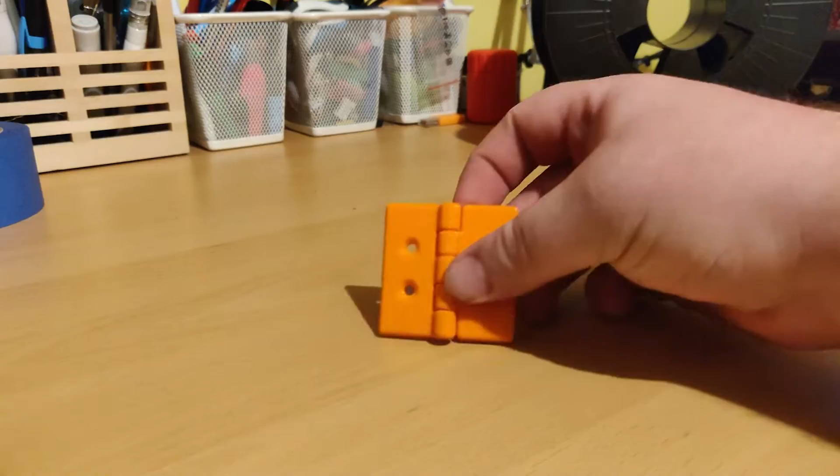Hi, I'm Connor from Connor.engineer, and today I'm going to be going through how I designed and 3D printed this hinge mechanism in SolidWorks. You can see it's very similar to a common door hinge, except it's a lot smaller, and the hinge mechanism moves quite freely.

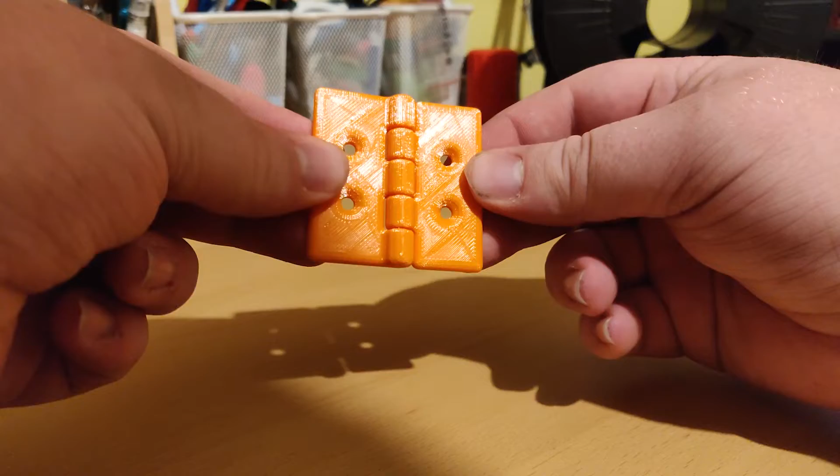I'm going to go through how to draw this in SolidWorks and how I worked out the different tolerances, so you can see there's no play in it or anything. I had to do a few different prints to work out the tolerances. If you saw my previous thread drawing video, you'll see how I figured out the tolerances for that. The tolerances for this are different because this is a print-in-place model, so it prints as one piece and you can't take it apart. But it's still able to move because there are gaps within the part, even though it can't be taken apart.

So we'll go over to SolidWorks now.

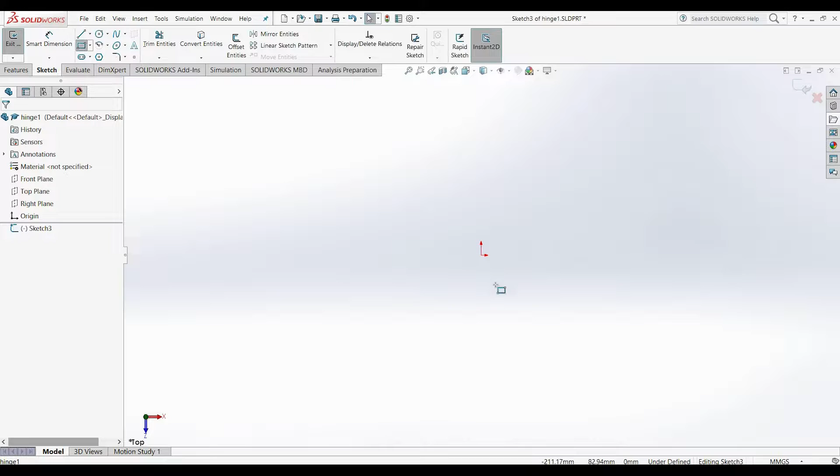I've just created a new part here in SolidWorks, and I'm going to start a sketch on the top plane. I'm going to draw a rectangle to start the basic shape of the hinge, and I want it to be 50 by 25. These dimensions don't really correlate to anything, it's just a small print so it's quick to print, because I had to print a lot of different ones of these to get the print working.

So we're just going to extrude that up 4mm as well. This isn't really important either, it's just to give a quick print and kind of gives a solid test piece.

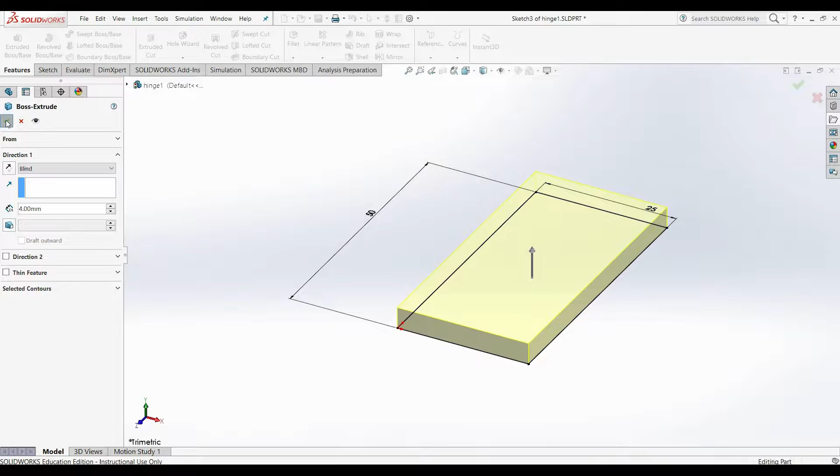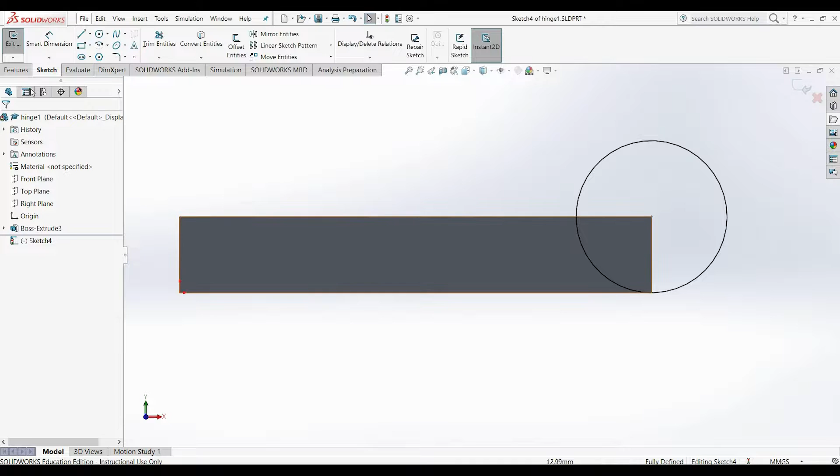So that's our main rectangle. We're going to come parallel and look at this edge, and now I'm going to sketch on the end of this, and draw a circle whose radius is the same as the height of this piece. So that circle is fully defined because its radius is along this line, and we're going to extrude this the whole way through the piece. That's going the wrong direction, so we're just going to go all the way through to the other end, and you can see that we're now starting to get the basic shape of our hinge here.

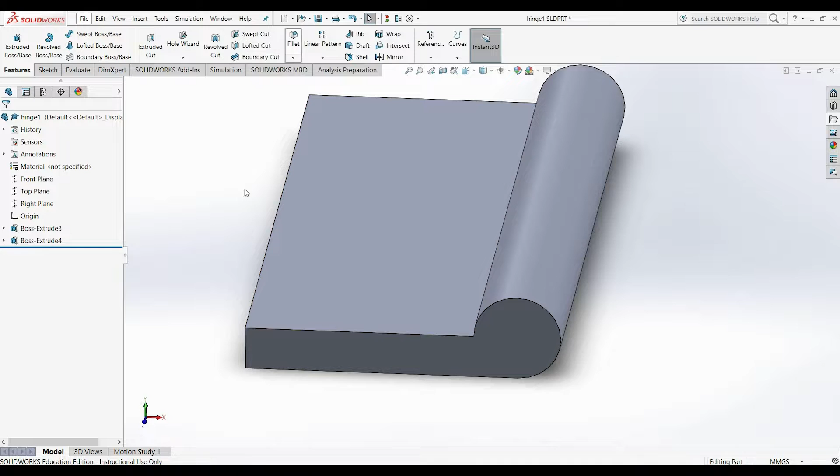The next thing I'm going to do is put in some fillets, just because it's convenient to do this. I'm using 2mm fillets here, just because it'll give us a nice rounded edge on this piece, since it's 4mm high, so you can get two 2mm fillets on a 4mm wide piece.

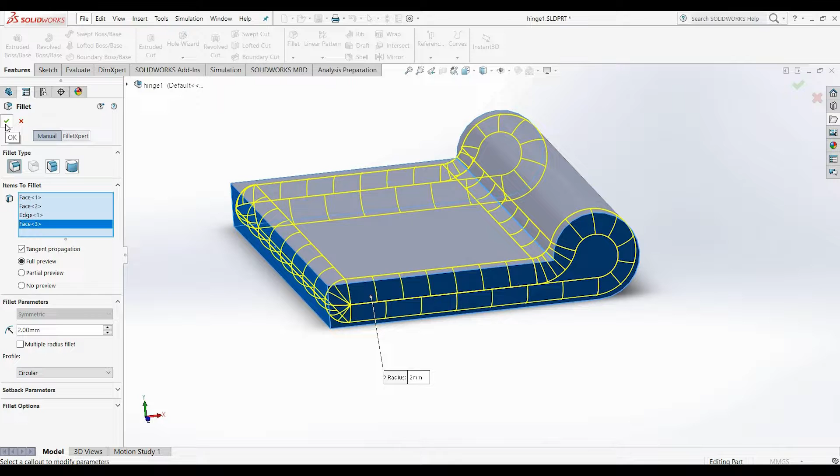So that's starting to come together now. I'm just going to draw some holes. These aren't really that important, it just kind of makes it look more like that classic door hinge shape that you would see.

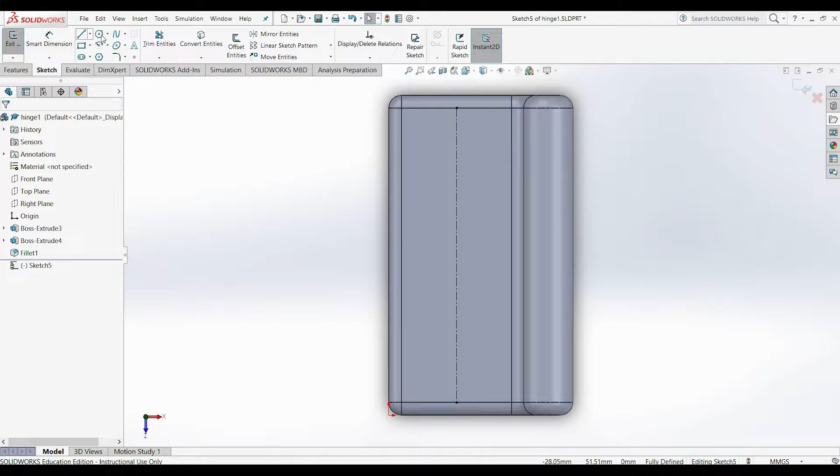I want this to be along this construction line just to help me line up the circles. I want it to be in the middle of this piece here. So we have those two circles. I'm going to pick 4mm here - again, it's not really that important, these are more cosmetic than anything else.

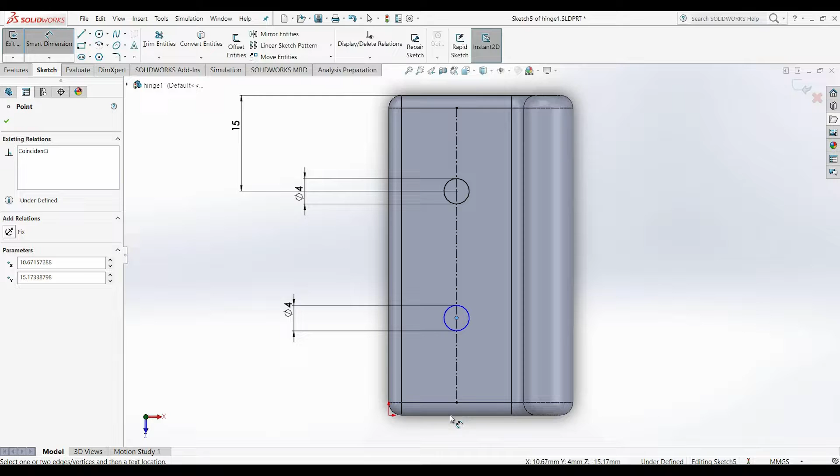Because the piece is 50mm high, I'm just roughly dividing it into thirds here. I know 3 x 15 is 45, but it kind of roughly gives you the right amount - you could work it out properly. But again, these cuts are not functional, they're just cosmetic. So we're going to cut these through all.

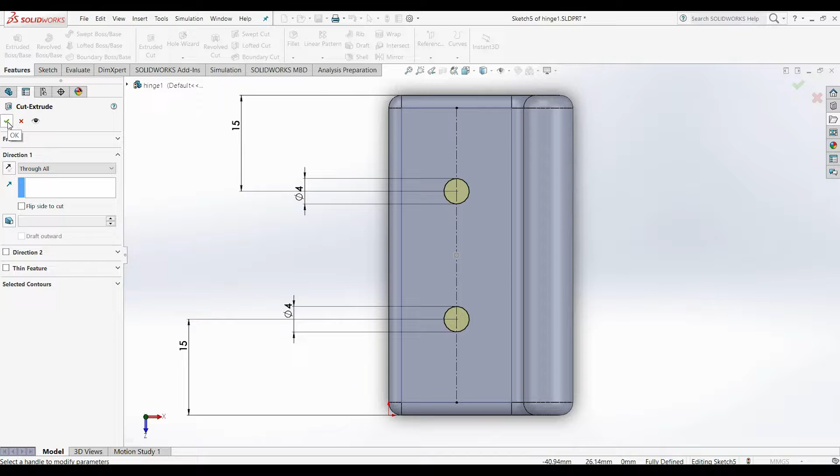Next I'm going to put a chamfer on it. Again, this is just to make it look more like a door hinge, it's not a functional part of the piece. So we're going to put a 2mm 45-degree chamfer on both of these, and now we're just going to do some more filleting.

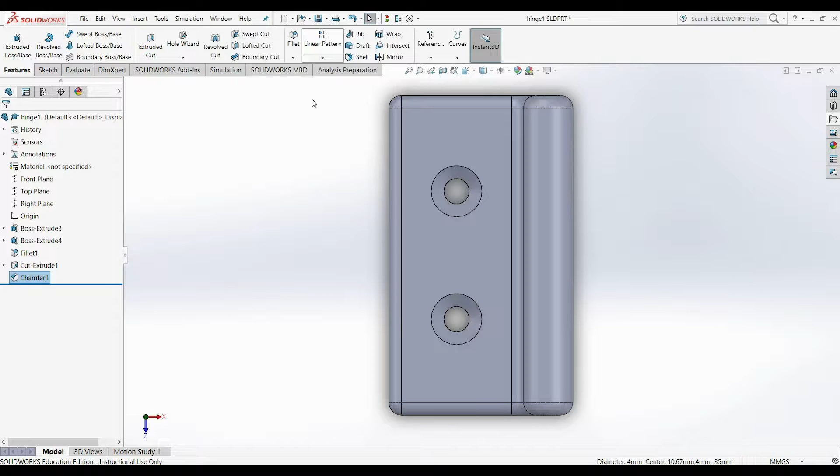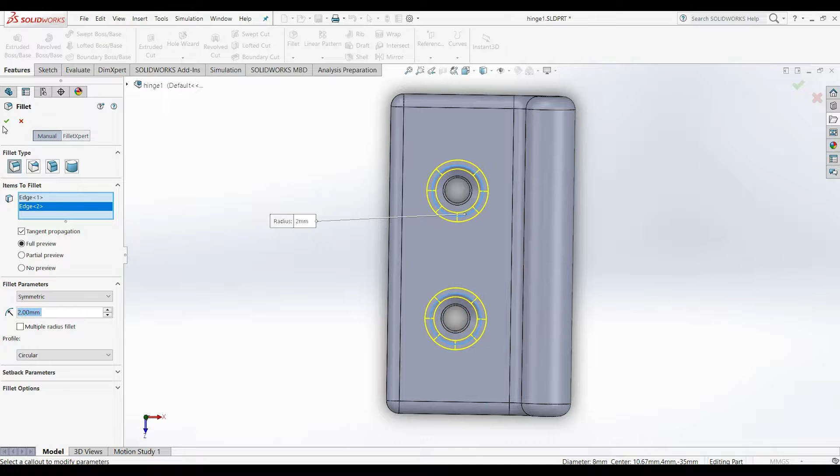Just because I don't like to have sharp corners in my designs. When you're working out fillets, just try and get the sizes to where it looks good. Like these are 2mm fillets, I could easily use a different size, it's just I think it looks nice.

So we have our holes in. What I'm going to do at this point is save this model, because we can use this part again to make the second half of the hinge. So I'm going to save this.

So now we have two parts that are both at the same stage. This is the basic hinge shape. We haven't done any shaping on the actual hinge itself.

Okay, so we're going to start drawing the gaps for the fingers here. Sorry about the cut, I forgot to switch back to my hinge 1 part instead of my hinge 2 part.

So the first thing we need to do is put in a reference plane. This is just so you can draw on this particular plane—you have to draw on a plane, you can't just draw in midair. So we're going to draw this in 10mm from the end, and open a sketch on this plane.

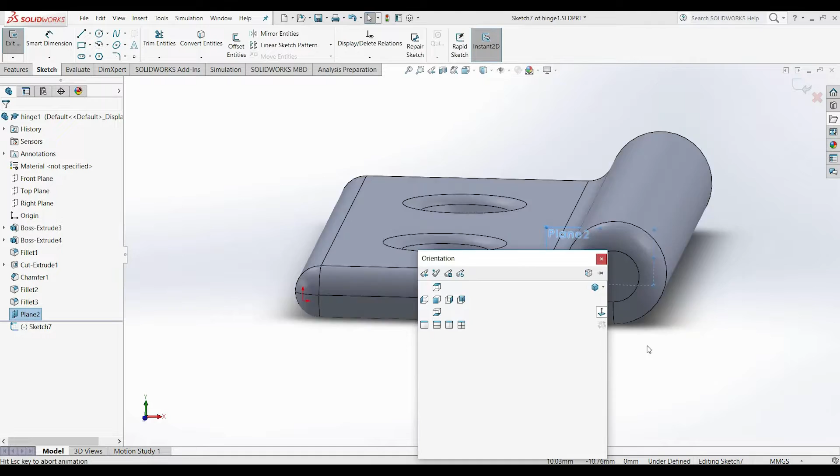I'm going to come normal to this plane just so we can see better what's going on. So I'm going to draw a circle, and this circle is going to be concentric to the circle that we drew originally. This circle is going to be 8.8mm wide.

So just to explain where the 8.8mm comes from: this circle is 8mm wide in diameter, because its radius is 4mm from the height. I discovered through experimentation that the best gap to leave for print-in-place parts is 0.4mm everywhere you want an air gap, so you need 0.4mm on each side—that's where you get the extra 0.8mm from.

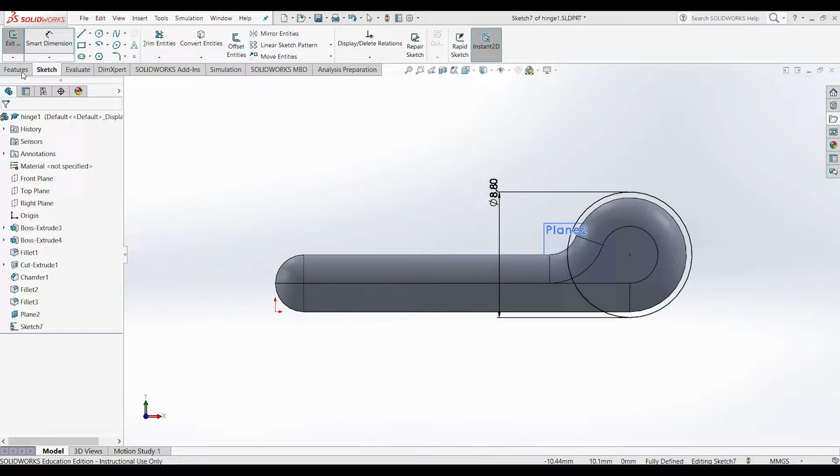So what we're going to do now is extrude cut this through some of the part, and we're going to extrude this 10mm into the part.

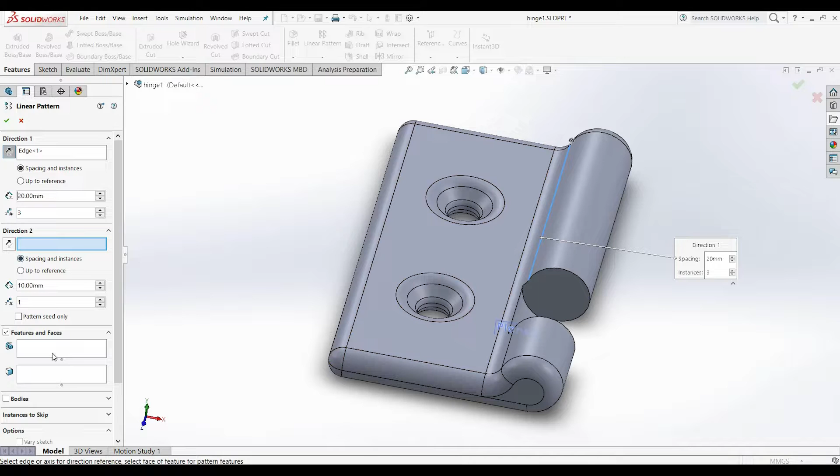Now we're going to create a linear pattern of this, just so I don't have to draw it again. So we just need to pick any edge going in the direction we want, and then the feature that I want to pattern, which is the cut.

And I want it to be 20mm, and I only need—sorry, 2 of them. So that's going to create another cut here.

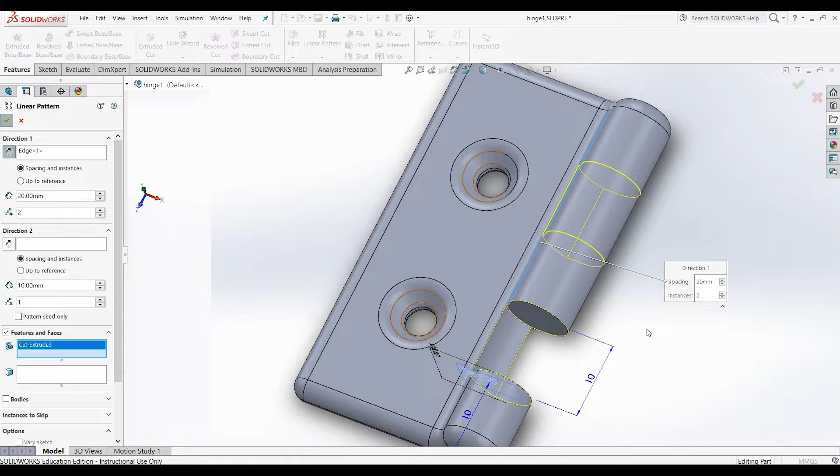So now we have our two gaps. We've created 3 fingers on this hinge.

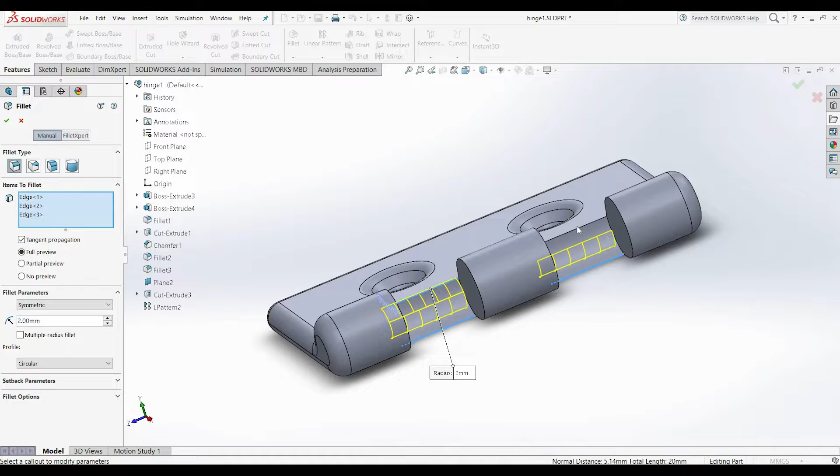So we're just going to put in some more fillets, again 2mm, just because that's what we've been using. And they're going to go in here to create a rounded edge and get rid of these sharp edges that are there. So that looks a bit better now.

So we're going to draw the actual lugs that come out into the other part on this piece, just because I think it's better to draw them on this piece than on the other piece.

But the first thing I'm going to do is hide this plane. I like to hide my planes and axes that I use for referencing, just because it makes the part easier to look at and follow.

Okay, so I'm going to open a sketch on the top surface of this model, and we're going to start drawing the sketches to do the revolves of the lugs in between the gaps.

The reason we can open the sketch on the top surface of this model instead of having to open a new reference plane is because this surface is 4mm up off the top plane, and the top of this is 8mm above the top plane. So this surface is actually in the middle, which just makes it easier for us since we don't have to draw another reference plane.

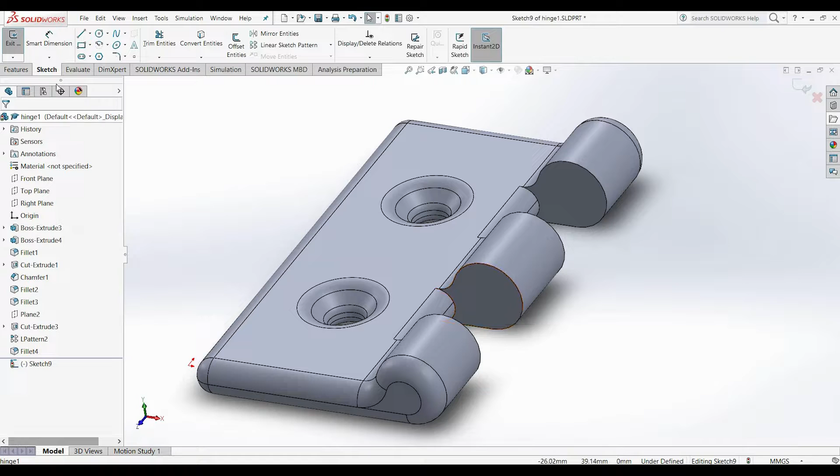So I'm just going to look onto this and start drawing my sketches. The first thing I'm going to do is draw a center line, and I'm going to make sure that this is 4mm away from the edge of this.

Because the center point of this line is no longer in the center of the circle that we originally drew, due to the fillets that we've done. So I just wanted to make sure that that is actually in the middle.

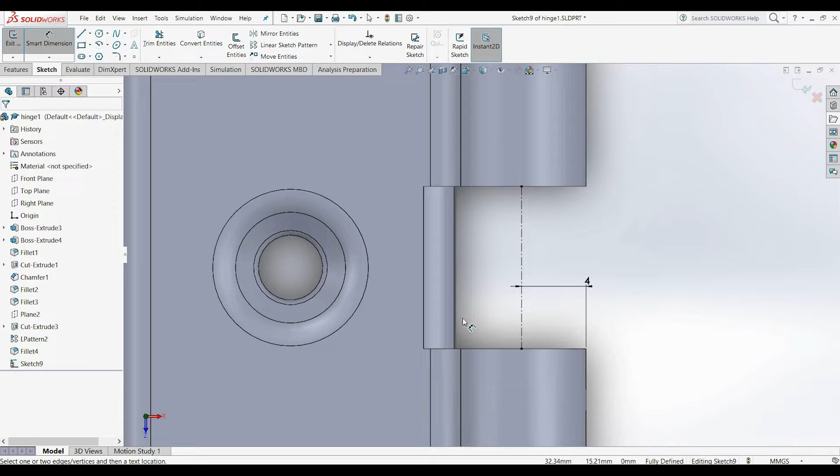The next thing I'm going to do is start drawing half of the lug, just to get the basic shape of it here. And remember, we have to close off our sketches when we do revolves.

So the height of this is going to be 3.8 mil—we'll go through these measurements in a minute—and the base of this is going to be 2 mil.

And the top of this is going to be 1 mil. So where I got 3.8 mil was when I originally drew this model, I drew it for a 0.2 gap between everything. But that wasn't enough because the parts fused together. So I redesigned it to be 0.4. Originally this was 4 mil with an extra 0.2 mil gap, but I had to pull it back to 3.8 mil because when I put this out to 4 mil and then put another 0.4 mil on top of it, there wasn't enough plastic in the middle for the other piece to hold together. So that's why it's kind of an odd measurement at 3.8 mil.

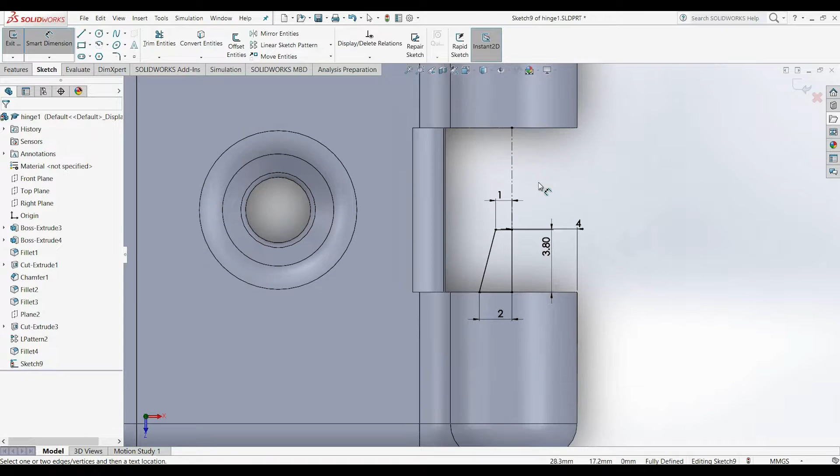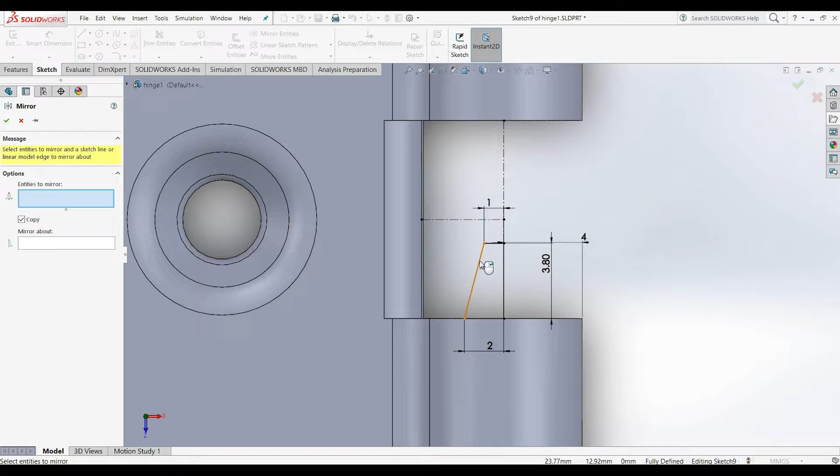The next thing I'm going to do is mirror this onto the opposite side of this piece, so I just need to find a center point here, and go to the center point of that line. We will mirror this across the other side. It'll just save us having to redraw this on the other side. Also, if we want to come back and change measurements, if we change this one, it'll change all of them.

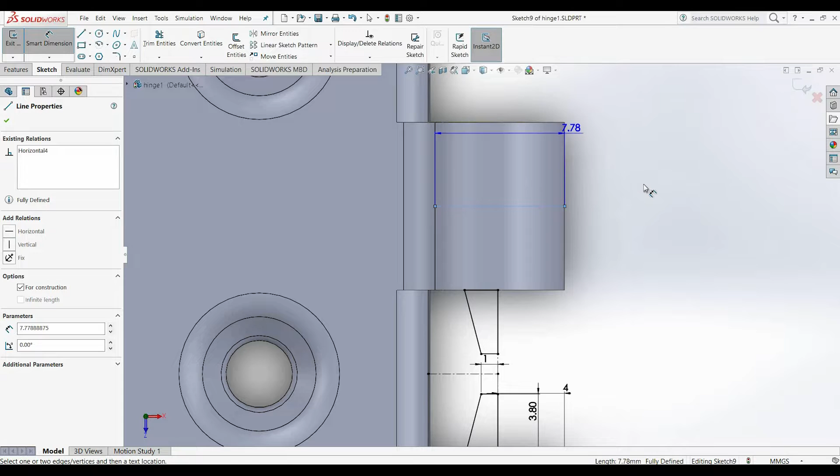So that's kind of a handy thing to do when you're designing things anyway. Draw as few things as possible so you can put in as few measurements as possible, while keeping it fully defined as well, obviously. Don't just use as few measurements as possible. We also want to put in a center line here so that we can mirror it onto the other side. Again, I want to keep all of this fully defined, so I'll just put in another dimension. This dimension does not matter at all because of the length; this is not important, I just want to get the mirror right. So we want to mirror this, all of this, into the other side, into the other gap. Mirror this about this, and that's going to draw that over there.

So now we have set up all of our lugs for our revolve. So we can come over here and do a revolve boss base. And the axis of rotation is any of these axes. Okay, so we've got our basic lug shape in here. You could do a bar the whole way through, but I'm not sure how well that would print with bridging and stuff, so I just did these kind of cone shapes, or kind of truncated cone shapes.

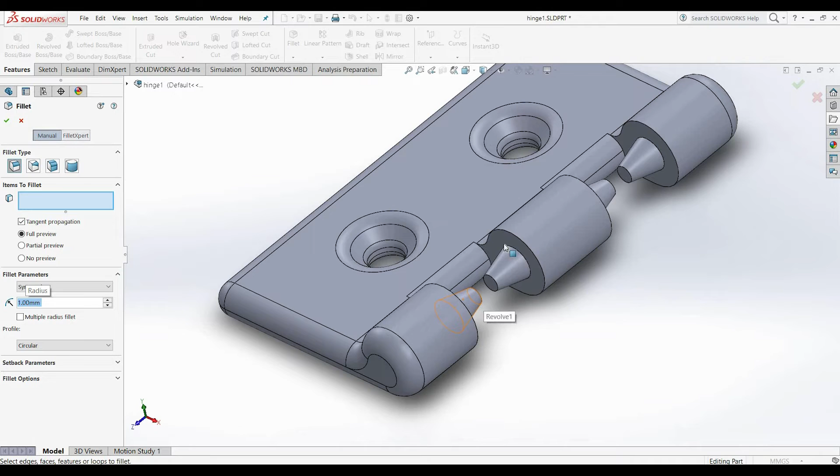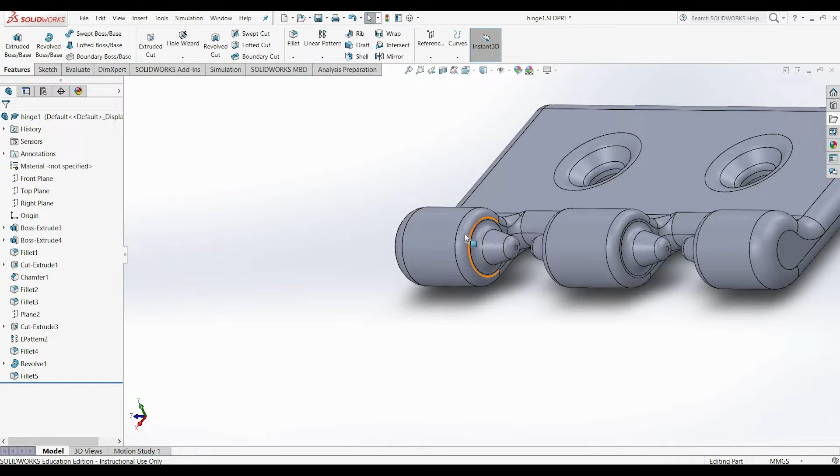So the last thing we need to do on this part is put in some fillets. I'm just going to put in some 1 mil fillets on the internal edges of these and on the ends of them, just to round out the part and make it look a bit better. On the cosmetic parts it kind of looks better on this side. These are functional fillets in here, just because you don't want any sharp edges on the inside of this, just to kind of reduce friction and stuff.

So that should be the first hinge fully finished, and we can move on to the next part now. The last thing we want to do before we move on to the second hinge part is we need to slightly modify this first hinge and create another part using it. So in order to make the second hinge part, we need to have a version of this one with larger lugs so that we can cut this out of the other one in order to create the holes that the lugs will fit into. But we need the larger lugs so that there's a tolerance between both of the parts.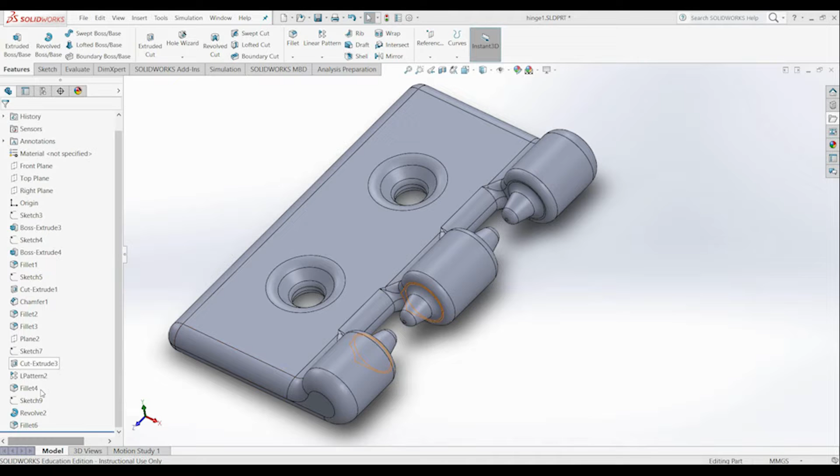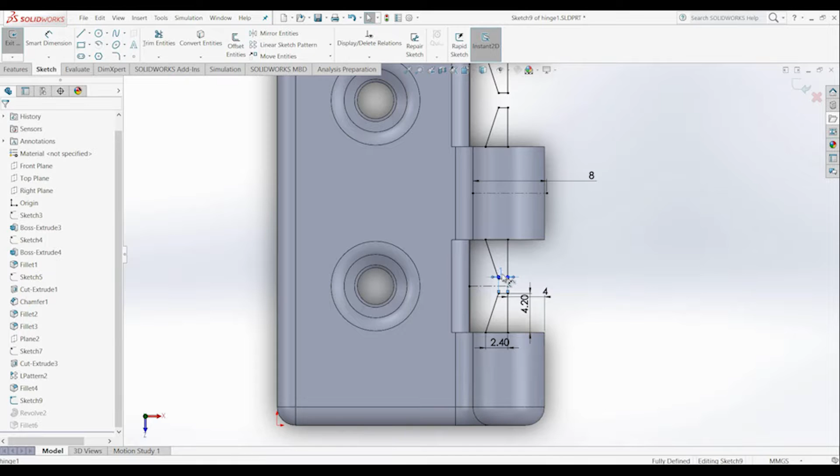So in order to do that, we just edit the sketch that the lugs are based on. I'm just going to come normal to that, and we're going to add a 0.4 mil tolerance to all of this. So 2.4, 4.2, not that one, and 1.4. And this will create the larger lugs that we need in order to do the cut.

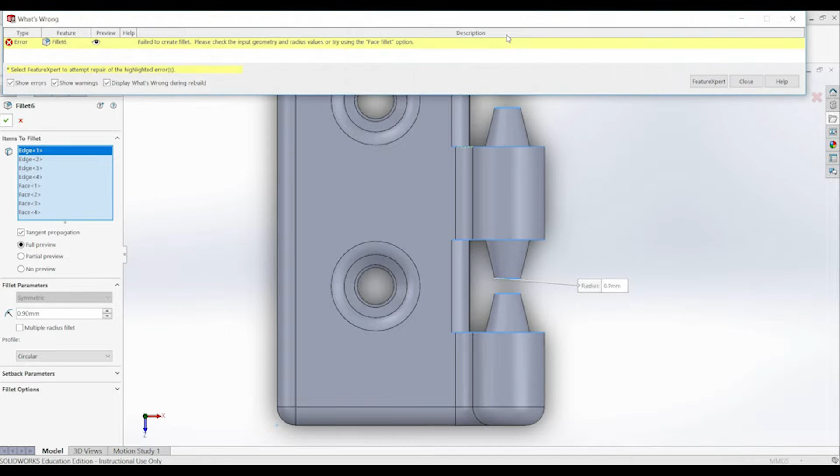You may have some problems with some of the features that you did after this, like the fillet, so we'll just see what's wrong with this. Okay, the radius on this is a bit too wide, so we'll just change that down slightly. That's still not working. So we'll go with 0.8, and that should work, yeah.

So that should be our finished part that we can use to cut out from the other part. We'll move on to the second hinge part next. I've opened up the hinge 2 part that we saved off the part that we were working on before, and we're going to start turning this into the second hinge part.

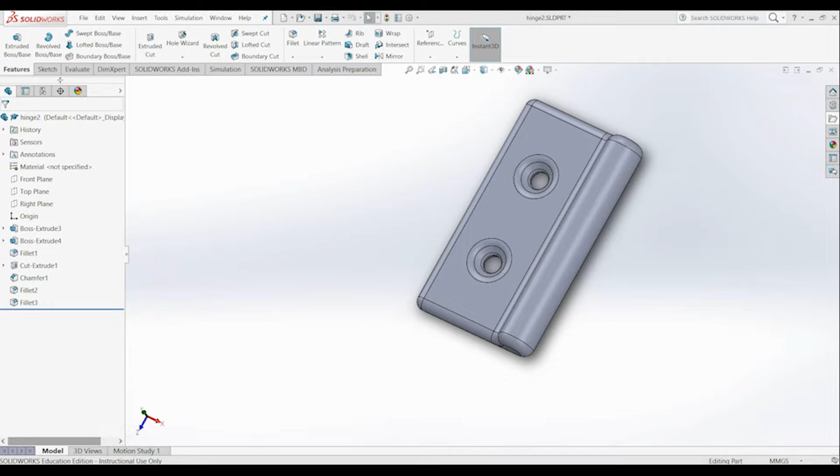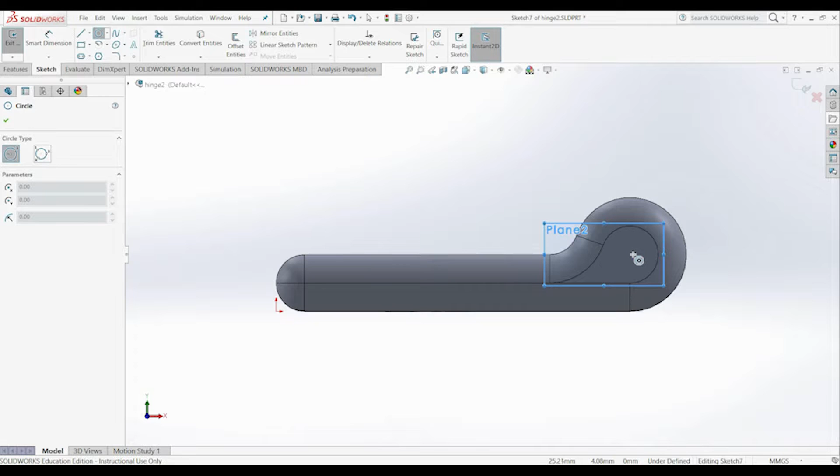So I need to create a plane that's 0.4 mil away from the edge of this piece. Again, a plane is just something that you can draw on. You can come normal to that and open a sketch. So it's going to be similar to the other one in that it's going to be a concentric circle to our other circles that we've drawn.

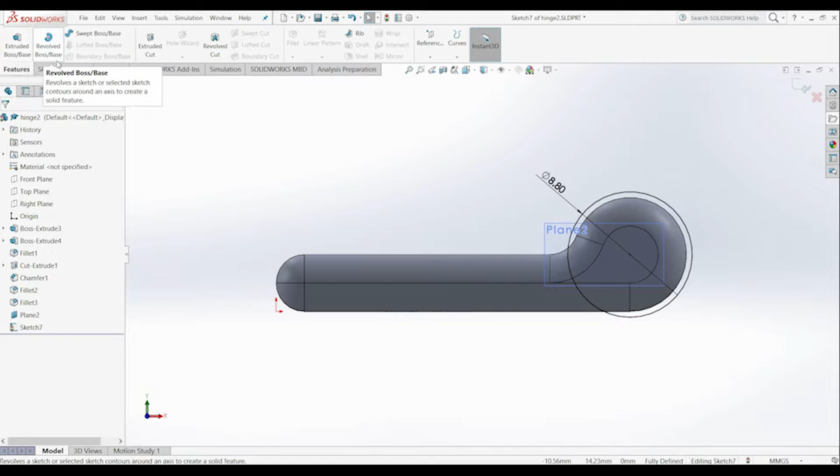They just need to be concentric. And this is again going to be 8.8 mil in diameter to give us our air gap. We're going to extrude this through the piece. Extrude cut for 10.8 mil. Okay. And now I'm going to hide my reference plane.

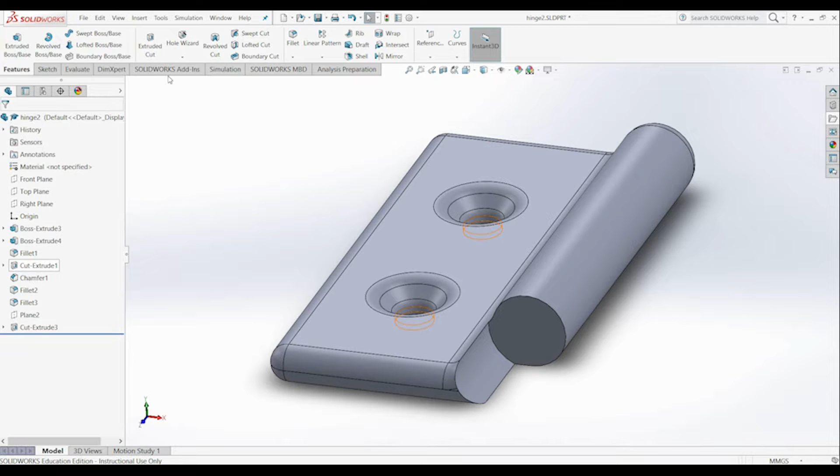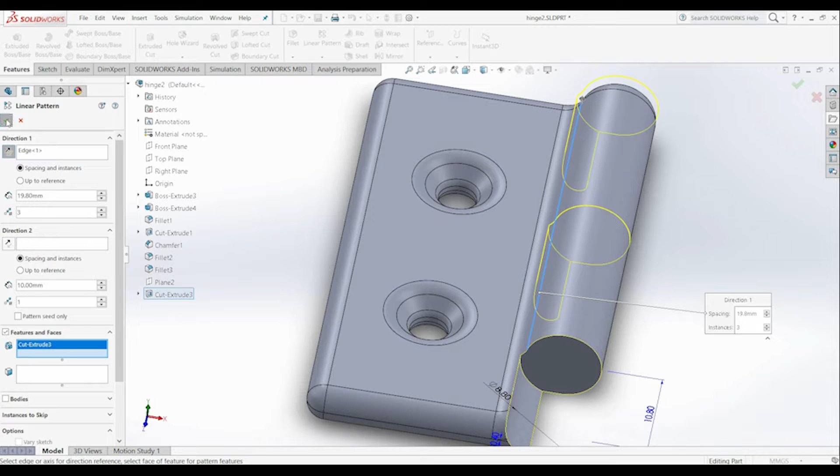The next thing I need to do is create a linear pattern. Any edge along the direction we're going will do. It's going to be 19.8 mil apart and 3 instances of this feature. So this is going to be this cut. I'm just going to finish that. Okay, so now we have our 2 fingers.

So these fingers, the different measurements I used there were worked out so that there would be 0.4 mil of a gap between all of the fingers on both sides of the hinge.

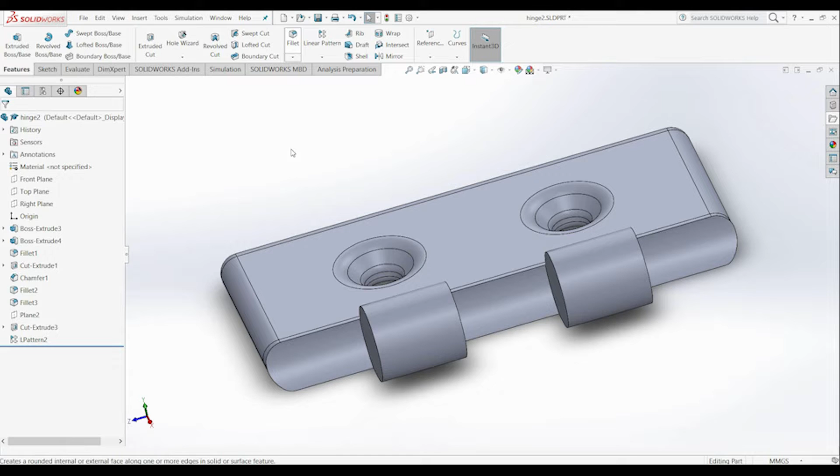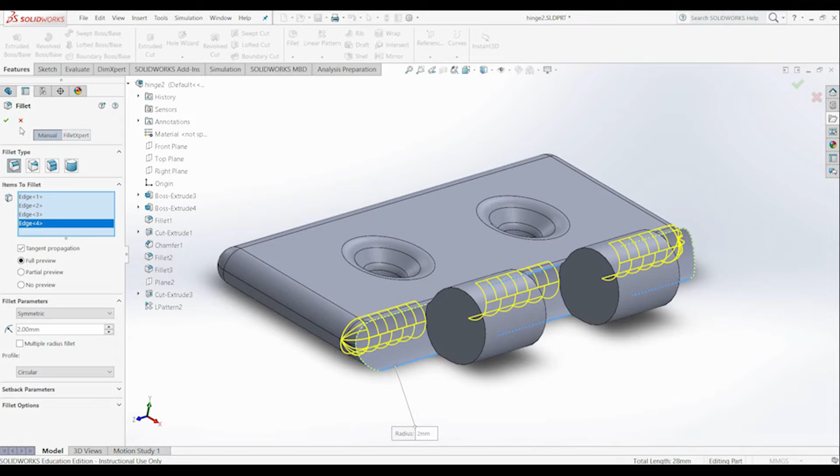So the next thing I'm going to do is create some more fillets, just to get rid of these harsh edges. Yeah, so these edges on here are just going to be filleted. Okay, so that's a lot better.

And now I need to fillet. Sorry, I forgot to fillet these edges. I'm just going to fillet them. While I have this open.

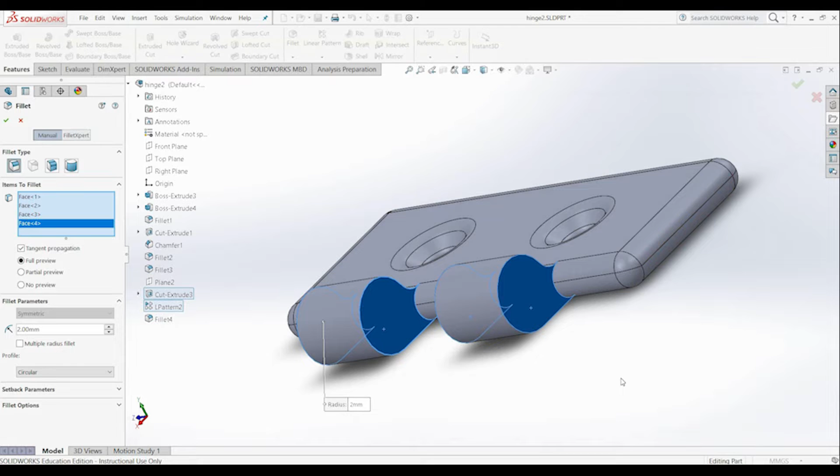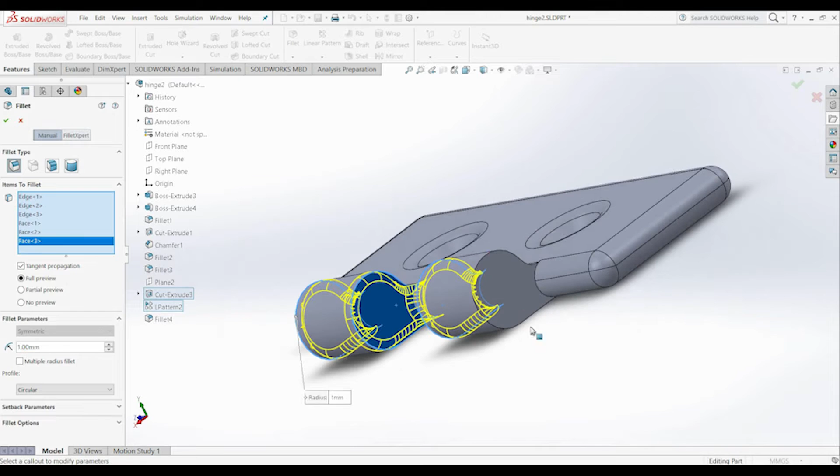Sorry, this isn't a 2 mil fillet, this is a 1 mil fillet. Sorry, I mixed this up with a different command I had. And it's along the edges, not the faces. Sorry, it is the faces, yeah, it's still the faces, but it's just a 1 mil, not a 2 mil fillet. Again, to work out your fillets, you just mess around with the dimensions until it looks good. But these have to match the other fillets we've already done. That's where that 1 mil has come from.

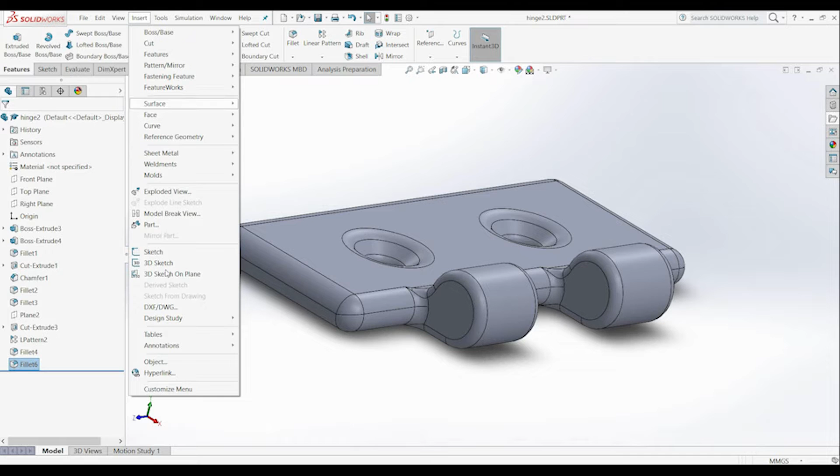So the next thing I'm going to do is insert our combined part that we had made previously. So insert part, and I'm going to pick this combined part that we have here. When you bring this into SolidWorks, make sure you tick the locate part with Move/Copy feature. This will allow you to create mates after you've dropped in the part.

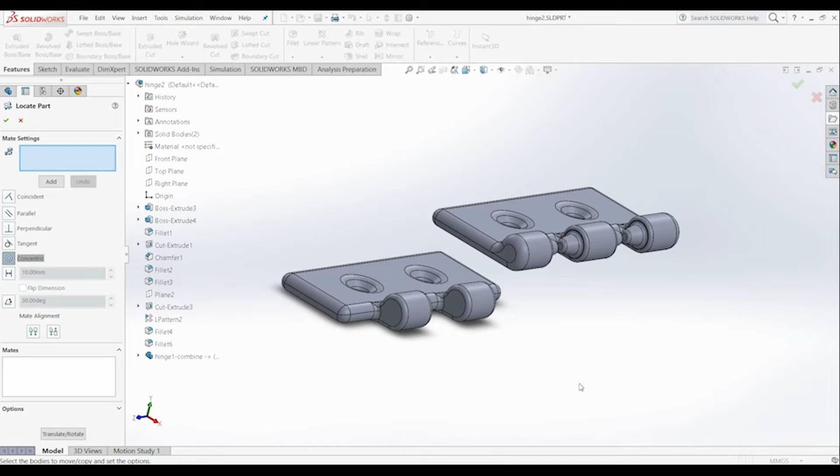And the 2 mates that we need to create are concentric circles. Any 2 concentric circles on this piece. And I'm just going to flip this around so that it's in the correct orientation. I'm going to add that. Don't click the tick yet because it'll get rid of that.

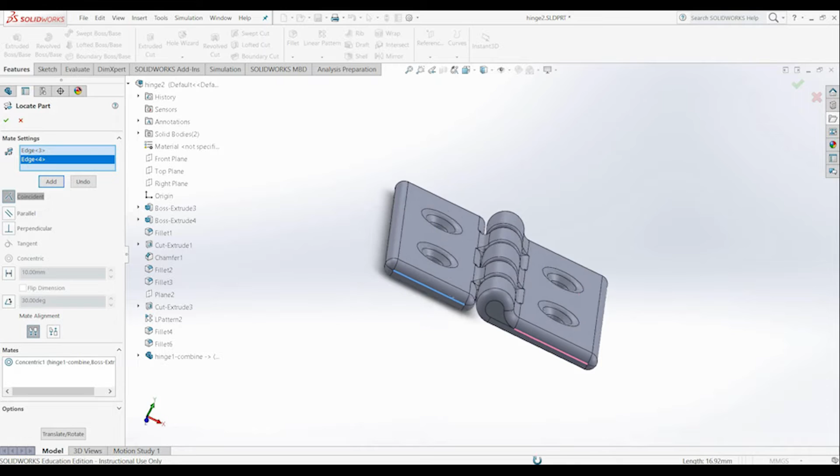And now we also need to bring these together. So that will have lined up those parts. And we can click the tick now.

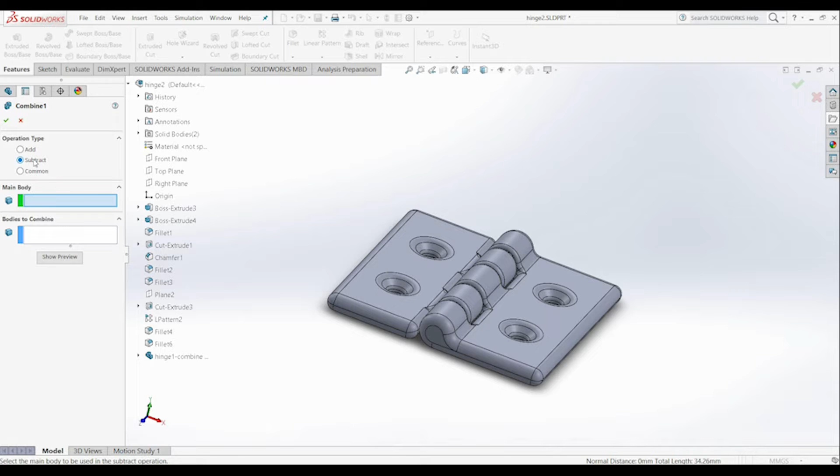Now the next thing we need to do is combine this part with the other part that we're trying to create. So if we go to insert features, combine, it's a subtract combine, and the main body we're using is this body here. And the body we want to combine is this one. You can see a preview of it there, so it is cutting out the thing. And that's this part finished.

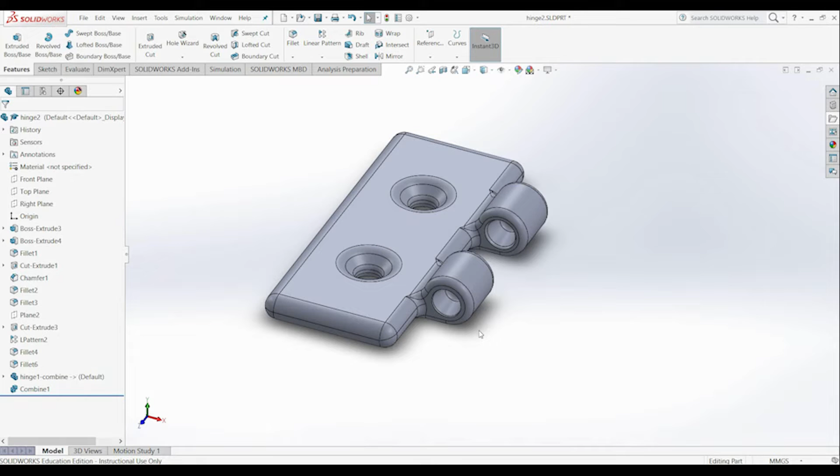So we now have our two hinge parts created. The next thing we need to do is put them together. I've created a new assembly here in SolidWorks.

When we print this file, we need to actually assemble it before we do that, because this is a print-in-place model, and the part comes out finished and assembled after it's been printed. There's no further assembly done by the user. We need to put this together.

So we're just going to insert our components here. Just put down the push pin so that we can insert multiple components all at once. So that's our first hinge part. And we're just going to bring in our second hinge part now.

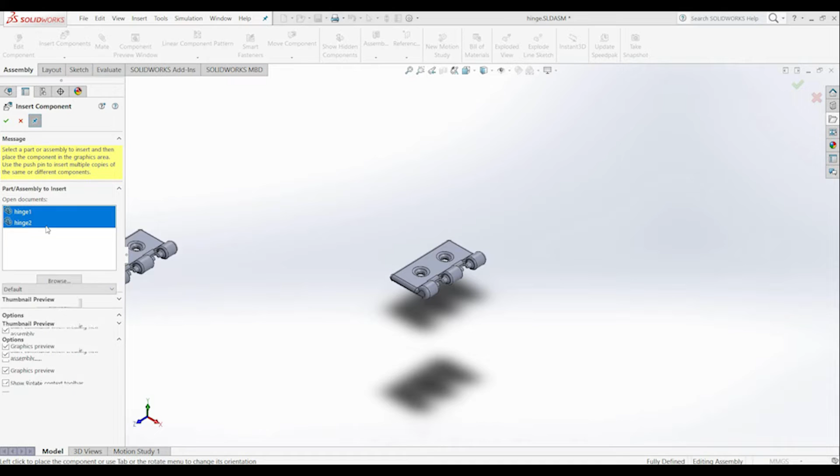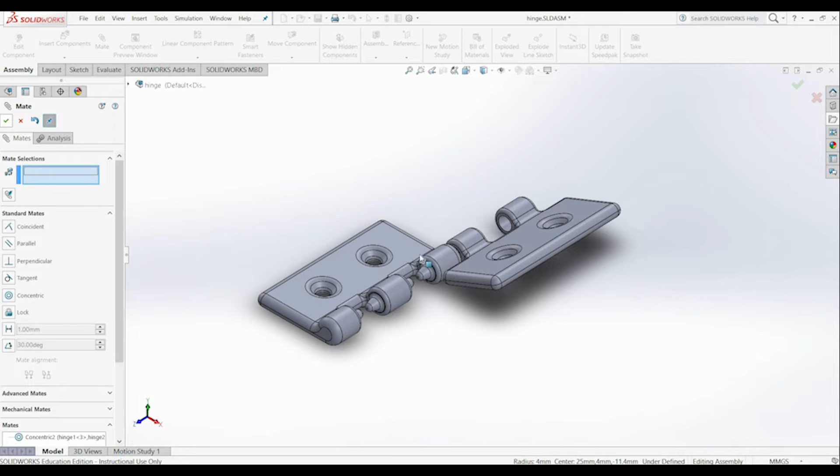So that's our second hinge part there. Now we need to do our mates. The first mate is between any of these circles, creating a concentric mate, and we flip this around so it's in the correct orientation. The next mate is between any edge on the edge of this, just to line it up correctly. That's all the mates we need in this model.

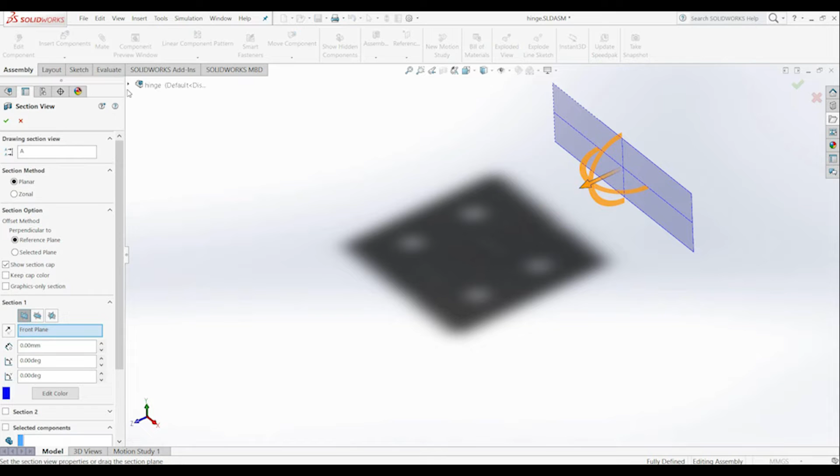You can see we have the gaps and the hinges fitting together properly. Now I want to sanity check my design, so to check that the gaps are correct, I want to do a section view along the right plane.

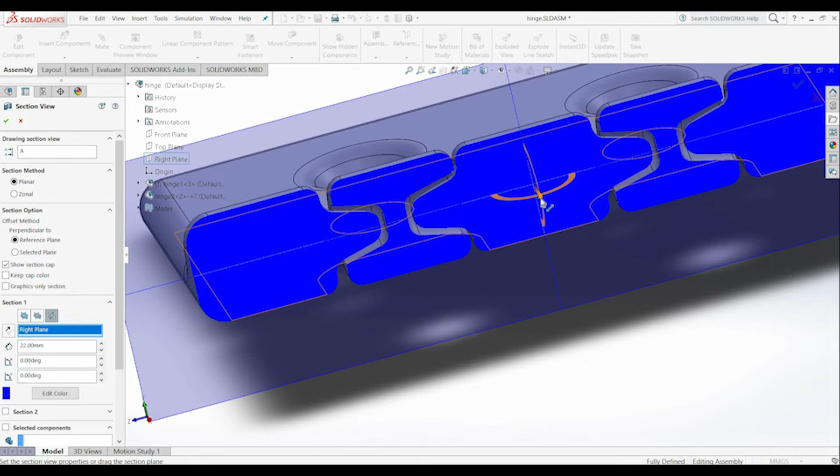I'm bringing this into the middle of the model to see the gaps at the center of the hinge. We can see there is the correct amount of space between all of those, and that should print correctly. We can drag it over and back to see there's a gap all along there, and there is.

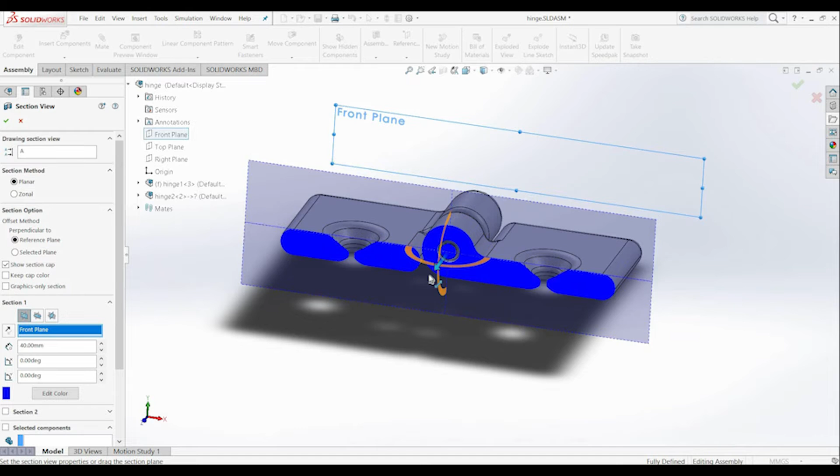I might just check along the front plane as well, and do a section this way just to make sure. You can see the gap there on both sides between them is correct, and it is. So this part should be ready to print.

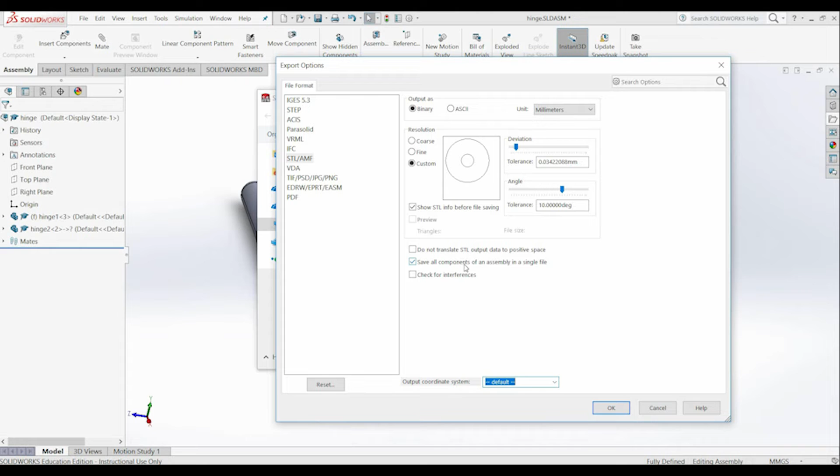By default, when you save an STL in SolidWorks, if I switch this to STL, it will save all the different parts in the assembly as separate STLs. So you go into the options and need to save all components of an assembly in a single file, which creates one STL from your assembly. We just need to save that, and this part is ready to be sliced now.

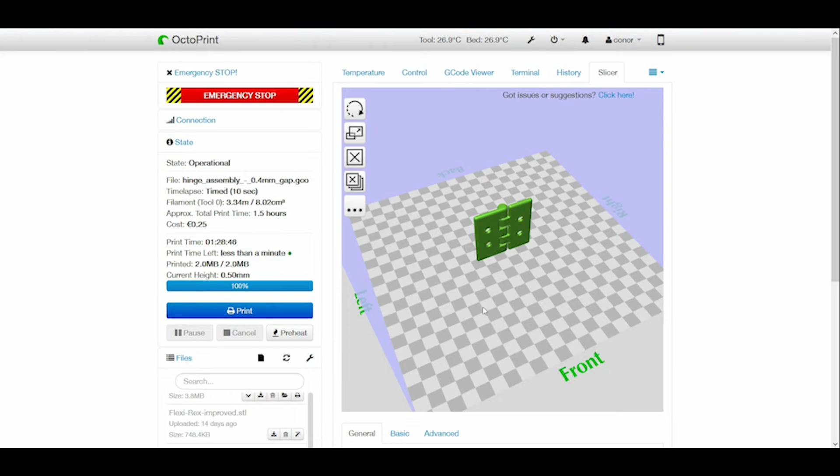So I'm just getting ready to slice the final model here. I've brought my model into Cura inside Octoprint, which is the software I use to manage my 3D printer. When you import the model, it'll probably be orientated incorrectly, so you just need to change the orientation of it.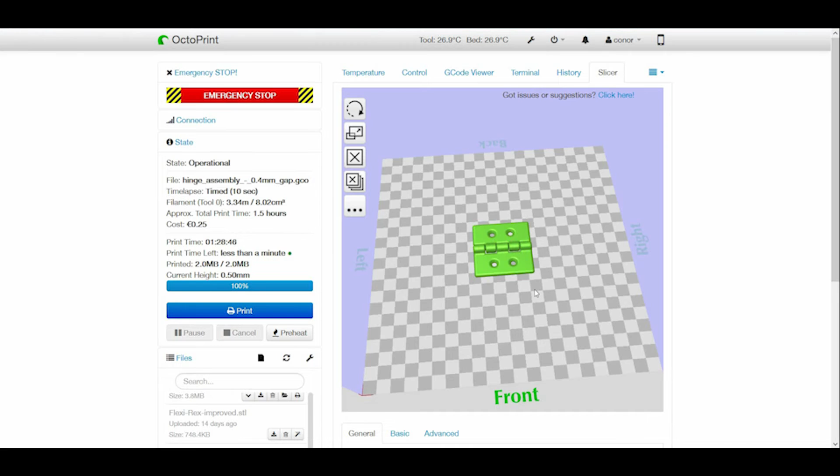It doesn't really matter which way you print this, but I think it might make a difference, so I'm orientating it this way, the way I printed all my test prints and they came out fine, so I don't want to change that. I'm positioning this on a spot that's easy to get off the bed, because this piece has a large footprint relative to its height. It would be hard to get off, so I put it near the edge of the bed for space. It's very close to the edge, so it's easy enough to get a knife under it.

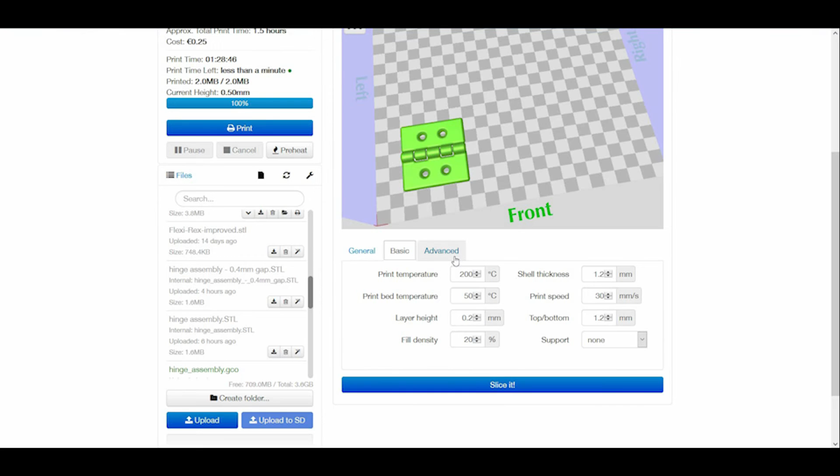I'm using an ANET A8 with some basic settings: 200 degree nozzle temperature, 50 degree bed temperature, 0.2 layer heights, and 20% fill density. That doesn't really make a difference because there's so little fill in this anyway due to the 1.2mm shell thickness, so fill density doesn't really matter. I'm using a print speed of 30 millimeters per second. So this is ready to be sliced and then printed.

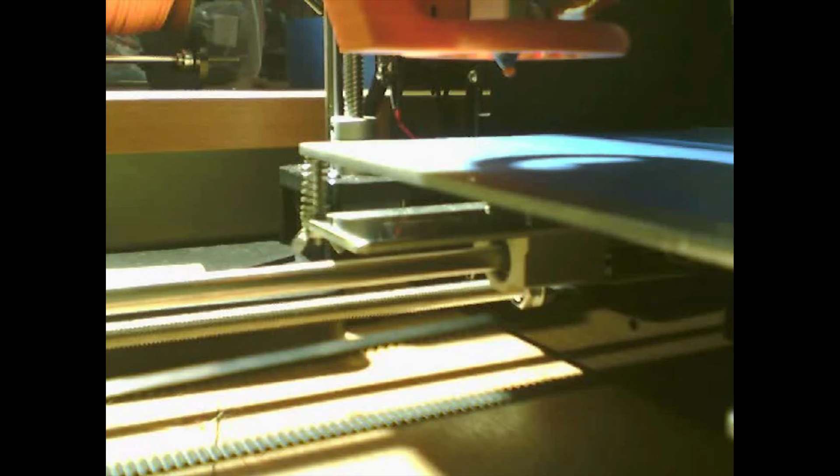Okay, so what I've got here is a time lapse of the printing. It takes about an hour and a half to fully print, so it's a quick enough print, and this is just the time lapse.

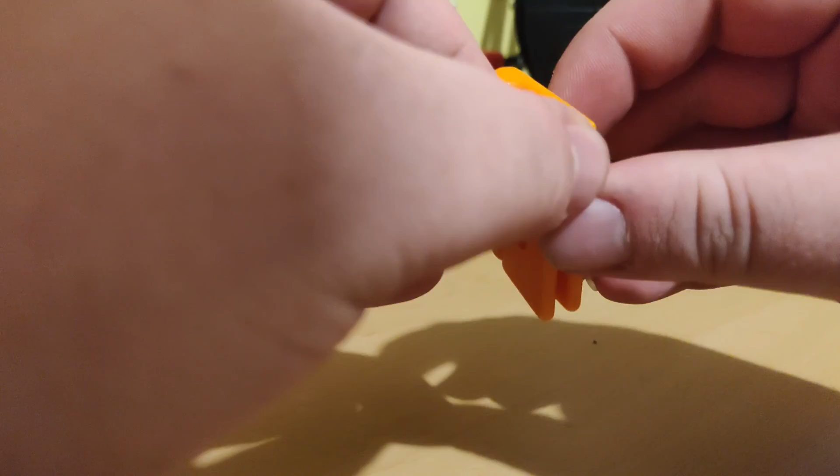Okay, so at the end of all that, we have our finished piece, and you can see the movement in it and the tolerances are good. On my ANET A8, for a print in place part, a 0.4mm air gap between everything seems to be a good tolerance for working with print in place parts. You can see it moves quite well. Initially when you take it off the printer you might have to work it over and back a bit, but then after that it's fine. It moves very freely and seems to be fairly good.